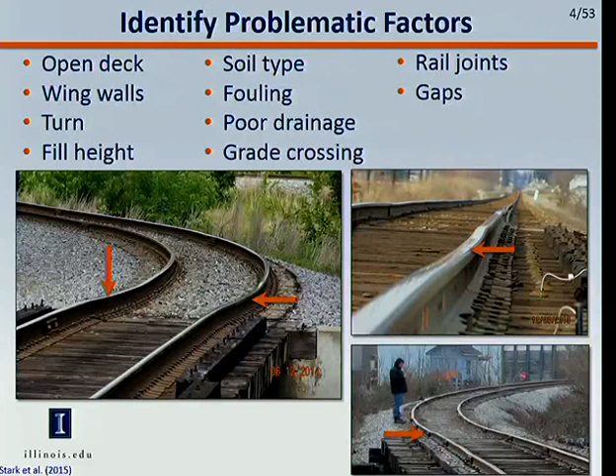And so that's where I'd like to start, is gaps in the track system. These can occur, say, between the rail and the tie plate, between the plate and the tie, and between the tie and the ballast. So that's where I'll start, and then we'll move to some other aspects.

So we started with a tie-ballast gap, and we sort of happened onto that with the instrumentation at 6 Amtrak sites on the northeast corridor near Chester. At these sites, wheel loads and vertical displacements with depth were measured, and there are 2 sites that I want to focus in on, 1 bridge, 2 sites.

It's the Upland Street Bridge and the open track site, which is about 60 feet from the approach, and the approach, which is only 15 feet from the bridge deck. So the open track site actually has more clay in the subgrade than the approach site, but it's still actually performing better than the approach. So less desirable geotechnical conditions, but better performance in the open track.

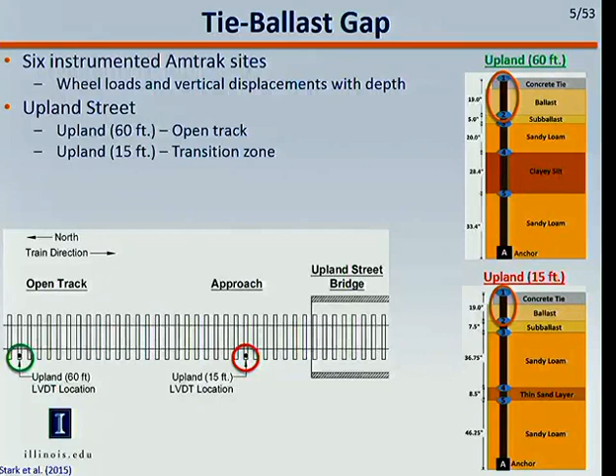So let's take a look at why. On the left is the transient displacements for the open track site, and on the right is the transient displacements with depth for the approach site. Let's focus in on the open track first.

The dark blue line here is essentially the movement of the tie under an Acela power car. You can see the first wheel hitting, and then second wheel, the body of the car, third wheel, and fourth wheel. The displacements there, transient displacements, about 0.4 of a millimeter.

Now the other important thing to notice is the LVDTs at greater depths are showing a similar response as the tie. Notice the peak or largest displacement of the tie, and then the first LVDT and subsequent LVDTs with depth showing essentially the same response. So what that told us was we had good contact or communication between the rail, tie, ballast, sub-ballast, and subgrade, because they're kind of all responding together.

Contrast that with the transition zone on the right, Upland 15, where the dark blue again is the tie, and you can see the tie is sort of moving a little bit before the wheel actually arrives. Then the tie displaces about 1.5 millimeters instead of about 0.4 millimeters, which is a very big difference. Notice the difference in the scale of those 2 vertical scales of those 2 graphs.

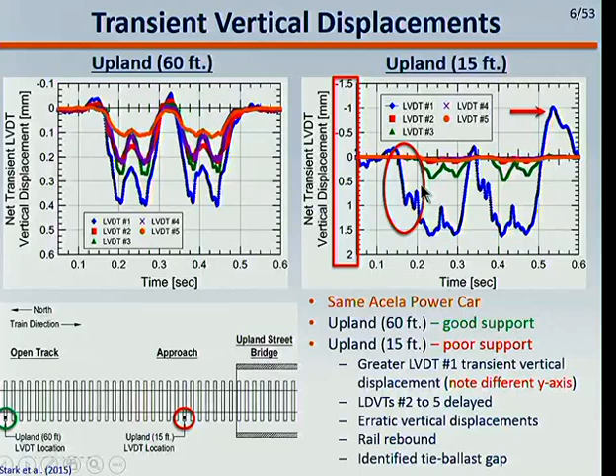So what does that look like in real life with a video? Here's a video of a track with really good support, probably some of the best we've encountered so far. Now watch the rail and the tie in this.

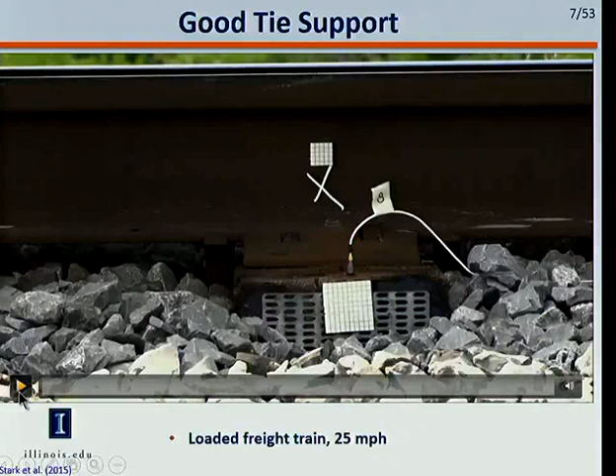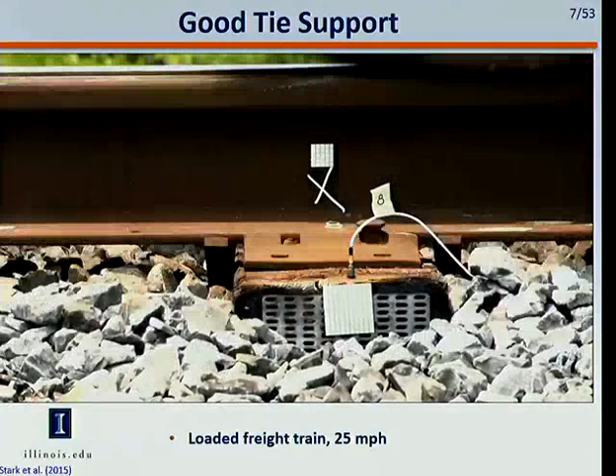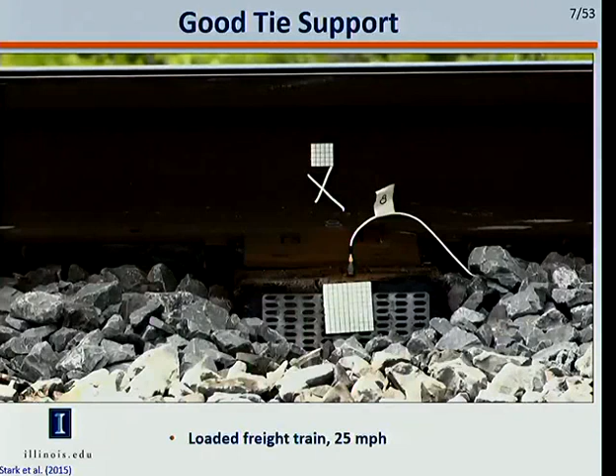Loaded freight train, 25 miles per hour. You can see our accelerometer attached to the tie and two targets, one on the rail, one on the tie, which I'll talk about in just a minute. Look at that - the rail, the tie, barely moving. Real tight, good support, so when the wheel goes across, it's loading the rail, loading the top of the tie, loading the bottom of the tie, and loading the ballast. Now let's contrast that with poor tie support and what that might look like, and explain the Upland 15 data I just showed you and the rebound of the rail.

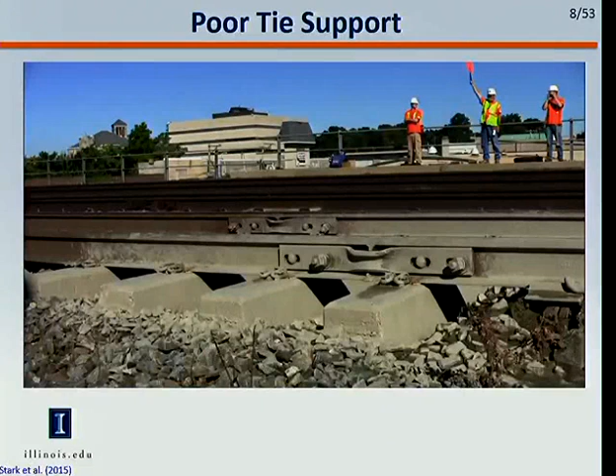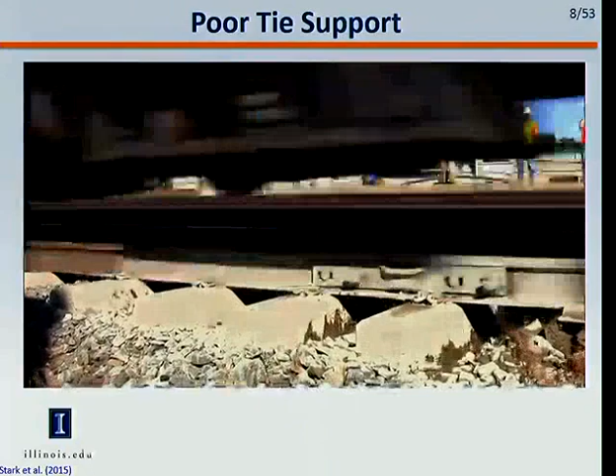This is a commuter train. So you saw the tie go down, the rail pull it back up, and so on for the next wheel.

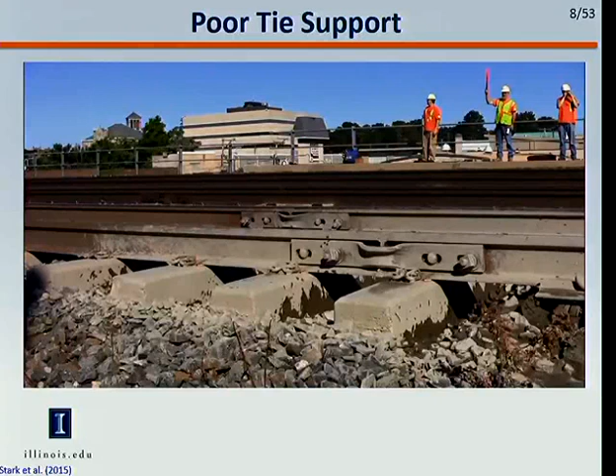Now there's one other thing to notice in that video. Anybody? The water. So there's the poor drainage and foul ballast that you saw on the factor slide I just showed. That led to developing a tie-ballast gap model, which is illustrated on the left in this schematic.

So where we start is with no wheel passes. The tie is in intimate contact with the ballast. The ballast is in a loose condition, less than optimal density. When the first wheel goes across it, which I'll show you a video of in a little bit, that tie compresses the ballast, the particles rearrange, and when the rail pulls it back up, we're left with a gap, essentially from the first wheel pass. So the real question is, how large does that gap grow to be over time?

So here's our model for it. With no wheel passes, this load displacement curve, which I show right here with my mouse, starts at 0, and then with every subsequent pass we have a gap. The question is, how big is that gap? And I'll show you how we're going to measure that non-invasively in just a minute. Then we have the load displacement behavior of the ballast - you can see it's a nonlinear function from the x-axis.

Up to a linear portion, and now we've got the tie in contact with the ballast. We've passed the seating load of the ballast, and now the ballast can start supporting some of the load. That essentially ends up with a linear load displacement curve, as you see there. So that's sort of the framework.

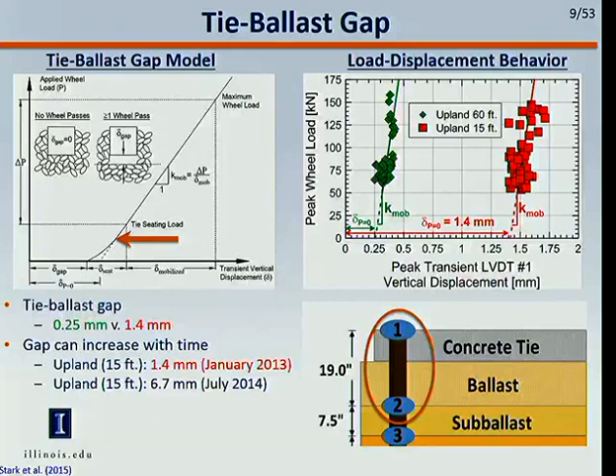Luckily there was some instrumentation also at Norfolk Southern, and that site experienced both loaded and unloaded cars. The unloaded cars allowed us to define this initial portion you see here in the red dots, giving us the initial curve, and then up to the seating load we get another linear portion. From that data we were able to fit an expression for the load displacement of the ballast.

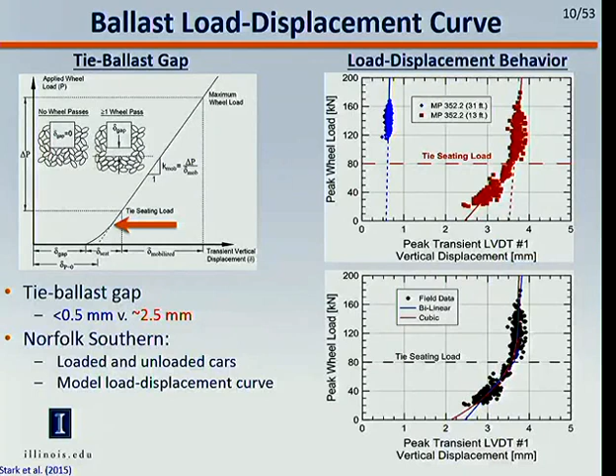We tried cubic and bilinear fits, and I think the cubic fit, in red, looks pretty good. That's what we'll use to predict the transient displacement of the ballast after, say, a repair or for a design, which I'll talk about in a minute. So that set up the tie-ballast gap for us, and the numerical modeling Steve's doing showed it's not just one tie, it's really what a series of ties are doing that control what the load distribution looks like. If we have gaps under multiple ties, as in this schematic, the load distribution varies considerably. So we had to find a way to measure the gap under a number of ties in a stretch of track, not just one tie. And that led to developing some non-invasive techniques for evaluating gaps in the track structure.

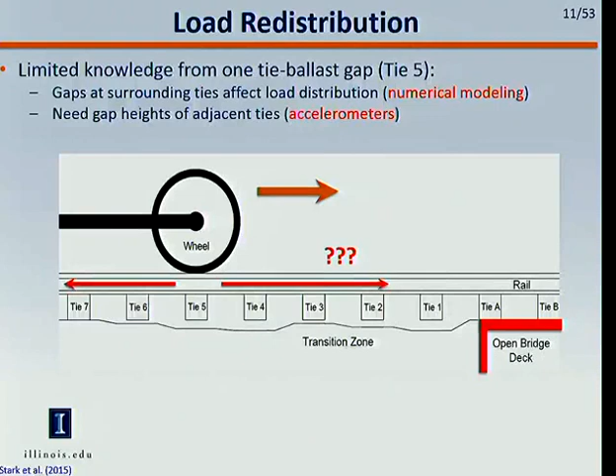So that's part two of my presentation.

Developing non-invasive instrumentation, at this point we're focused on accelerometers and high-speed video cameras. The accelerometers give us an idea of the tie acceleration, and we can use that with Newton's second law, F equals ma, to estimate what the applied loads are from the accelerations. So the accelerometer is giving us the heartbeat or pulse of the track, and high-speed video cameras give us actual rail and tie displacements during the loading.

We've investigated 10 sites so far, and this has been great because we have a range of good to poor support from these 10 sites.

Here's one particular setup on the left. Steve Wilk is here in the background operating the accelerometer data acquisition system. There's a video camera right next to him. And Professor Rose is here in the foreground operating a high-speed camera, sitting on an ASTM-approved bucket, I'm sure of it, with that camera ready to go.

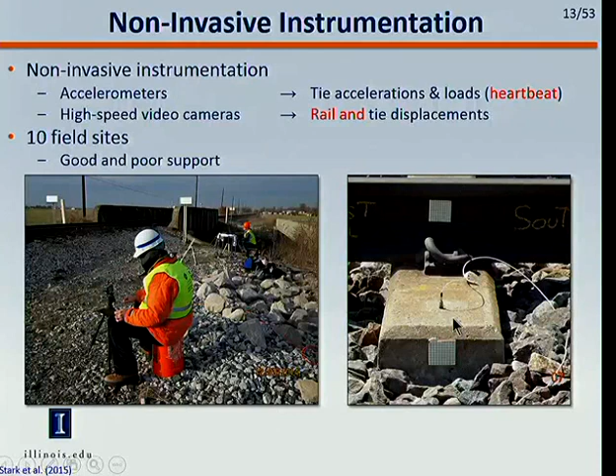On the right is the accelerometer we're using on the tie. A drop of super glue attaches the accelerometer to the tie, and we're all set. You can also see targets on the rail and the tie, and now we're putting targets on top of the tie so we don't have to move any ballast.

Let's see what we get from this. I'll start with accelerometers, taking you back to Chester and the Amtrak Upland Street Bridge site. Notice the tie where the red arrow is—this is a video of that tie, and there's an accelerometer on the end of it.

You can see the tie moving extremely rapidly, with the accelerometer measuring the accelerations of the tie. The response, the time history, is the red lines in the graph on the left. The green is the accelerometer under the same train at the open track tie—so green is good support, red is poor support in the approach. You can see much greater accelerations in the approach zone than the open track, about 30 G in the approach versus 5 G in the open track.

Based on looking at a number of sites, we think if the acceleration is less than 5 G, that's a good indication of good tie support. As I mentioned, we're trying to use Newton's second law, F equals ma, to predict the applied forces from the acceleration data.

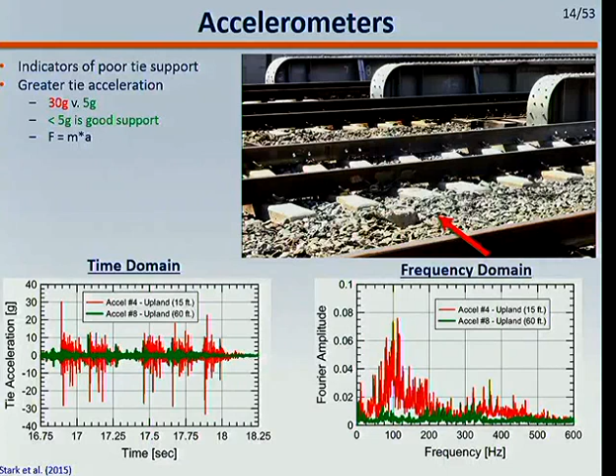So now let's shift gears to high-speed video cameras, and a site where we've used both accelerometers and high-speed video cameras, but this site really lent itself to high-speed video cameras. We have 8 accelerometers. We generally install 8 accelerometers at a site, and you can see them from number 1 on the bridge deck to number 8 out here where my pointer is.

We have 2 video cameras, one on accelerometer 2 and one on accelerometer 3. Now you'll see that accelerometer 2 and 3 have very different behavior, even though they're fairly close together. They're only 3 ties apart, but you're going to see a very significant rail-tie gap at number 2, and a significant tie-ballast gap at accelerometer number 3. We'll also show you the effects of a center-bound tie, the effects of air tamping, and also the effects of 2 transitions close together at this site.

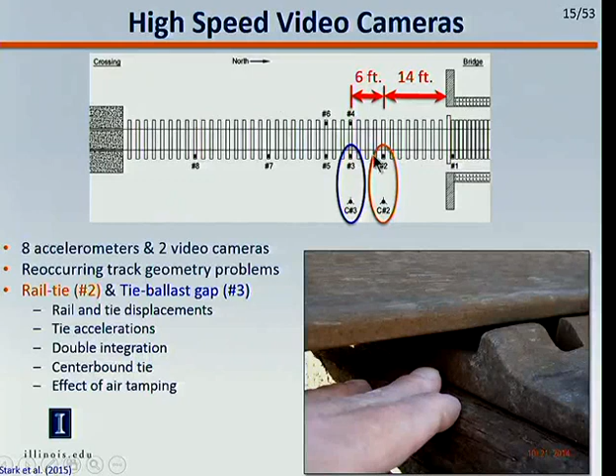So this was really a good site. Here's a grade crossing that I'm pointing to on the left, and of course an open deck bridge on the right. So this really was a good site for us.

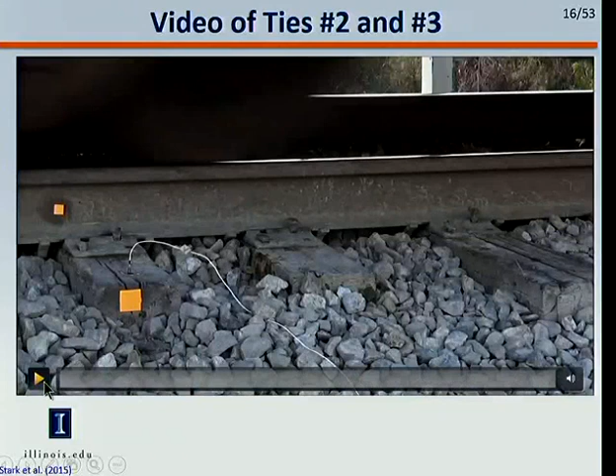So here's a video. The video starts at accelerometer 2, and then I'm going to turn to the left 3 ties, and you're going to see accelerometer 3. Now be sure to notice the difference in behavior between accelerometer 2, which is on the screen, and what you'll see at accelerometer 3.

Pretty significant rail gap. Still a little rail gap, but now the tie, you see a tie-ballast gap, just 3 ties away.

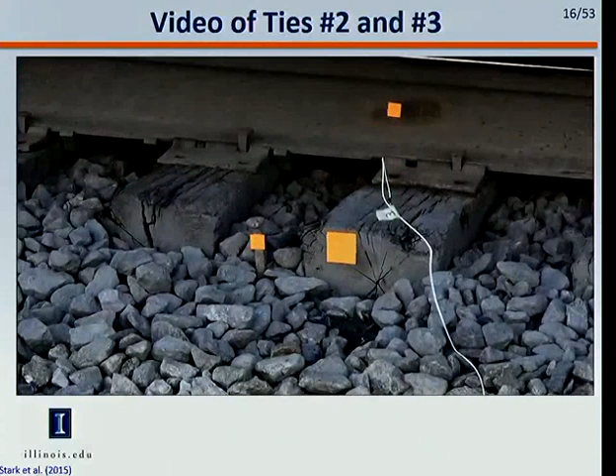Okay, so let's take a little in-depth look at the results from the video cameras and accelerometers. I'll start at accelerometer 2 and where video camera 2 is.

Here is a plot of vertical displacement from the video camera. Blue is the rail, orange is the tie. So as you saw in the video, quite a significant rail-tie gap. And if you look at the time history, you see a displacement of about 4/10 of an inch between the bottom of the rail and the plate. I'll have ground truth for that in just a minute.

Now, because there was such a large rail-tie gap, notice the tie doesn't move very much. There's such a big gap that the tie is really not feeling much load or moving much.

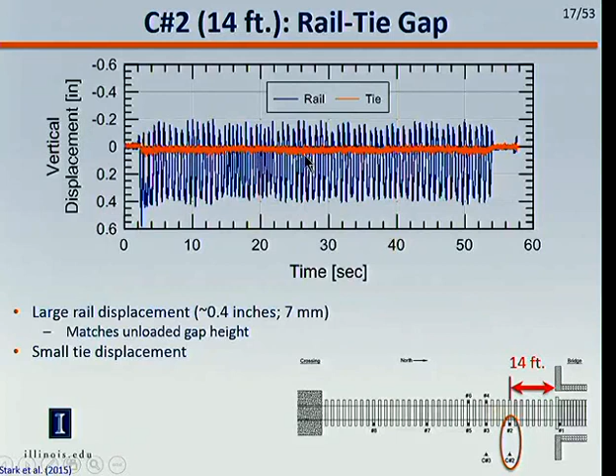So here's a photograph of the rail-tie gap. That's my finger, and you can see it's about 4/10 of an inch, not an inch... inch, not millimeters, which is in good agreement with the time history.

So here we expanded the time history from 20 to 22 seconds. The blue line is the rail moving about 4/10 of an inch, closing the gap, and just moving the tie a little bit, as you saw in the video. There's a little bit of rebound of the rail as it's coming back off the tie, and then back down for the next wheel load.

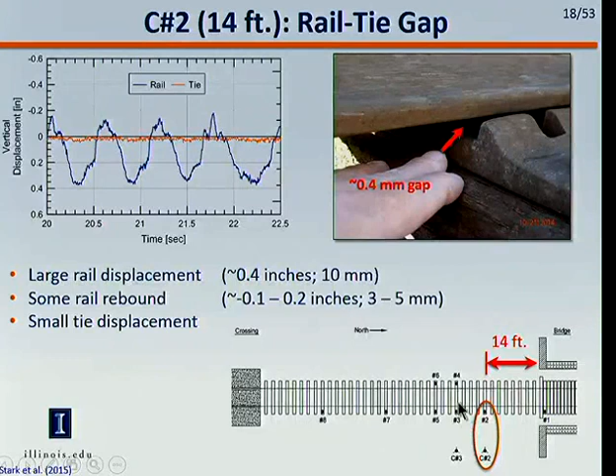All right, so now let's shift to accelerometer 3 and camera 3. Totally opposite, because you saw in the video there was a fairly small rail-tie gap, but a much larger tie-ballast gap. So the orange is now the tie moving, the rail is the blue, and the rail is deflecting now only about 2/10 of an inch, and the tie is now moving about 1/4 of an inch, because we've changed the gaps.

Now, this is about 20 feet from the bridge deck, and accelerometer 2 is 14 feet. So we can zoom in on the accelerometers now and compare that to the video camera.

Actually, I'm going to talk about the tie first. So we have a target on the rail and the end of the tie. And this led us to think that this tie is center-bound, because notice that the tie, the orange, is moving more than the rail. So the end of the tie is moving more than the rail, so it's bound in the middle, and it's sort of like cantilevered, with the end moving more than the rail.

I'm going to come back to this center-bound tie in just a minute and show you the accelerometer on the other end, number 4 right here, and you'll see 3 and 4 move about the same, and essentially the middle is fixed, so a center-bound tie.

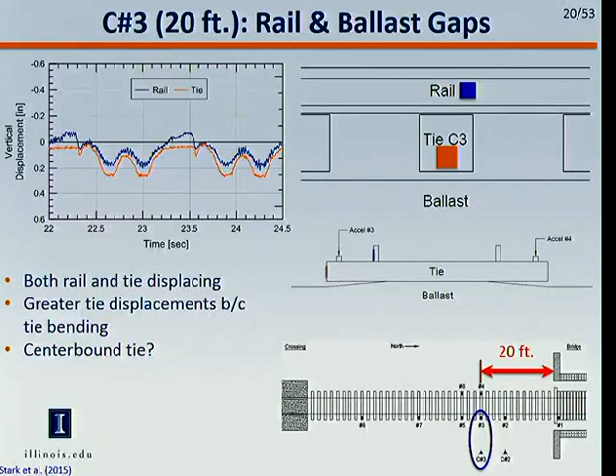Okay, so let me summarize accelerometer 2 and 3. At accelerometer 2, 14 feet from the bridge, you can see a significant rail gap here and very little tie movement. You move 6 feet away and you have a greater tie movement than you do a rail tie gap. So both gaps playing into the performance of the track.

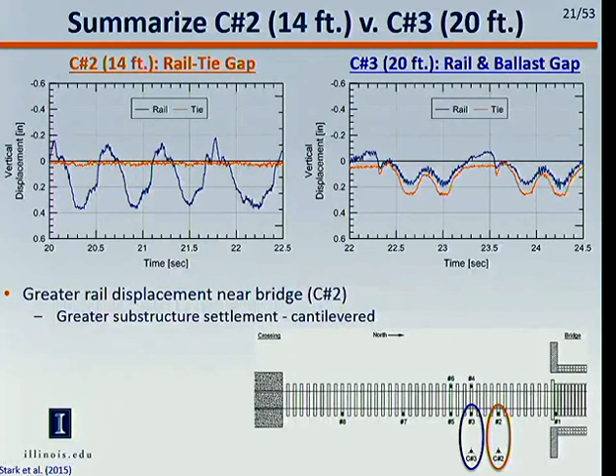We can use these acceleration time histories and double integrate them to get a displacement time history. Now we can compare the video camera displacements to the accelerometer-derived displacements and check our accuracy. So let's do accelerometer 2 and camera 2.

This top graph is the video camera displacement of the tie. You can see about 6/100ths of an inch tie displacement. And if you doubly integrate the acceleration time history, it's about 5/100ths of an inch. So pretty good agreement. Let me shift over to accelerometer 3.

We have about 1/4 of an inch to 3/10ths of an inch from the video camera, and the accelerometer giving us about 2/10ths to 1/4 of an inch of tie displacement. Again, pretty good agreement between whether we measure the displacement via camera or via accelerometer.

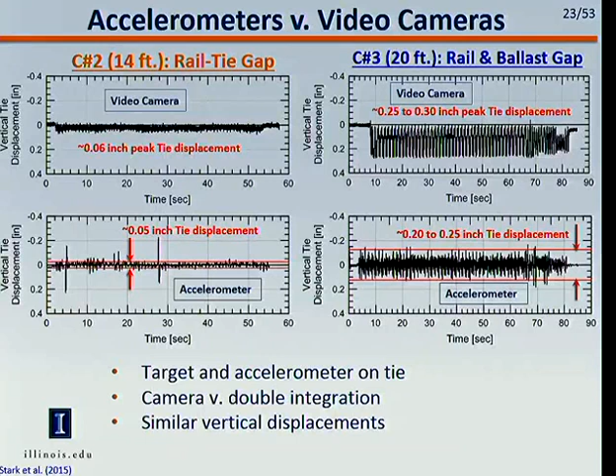Okay, so that's all the good news. The even better news is, on one of our visits to the site, the next day, the railroad air tamped this stretch of track. So, start of the second day, they air tamped, say, from roughly just in front of that grade crossing to the bridge deck.

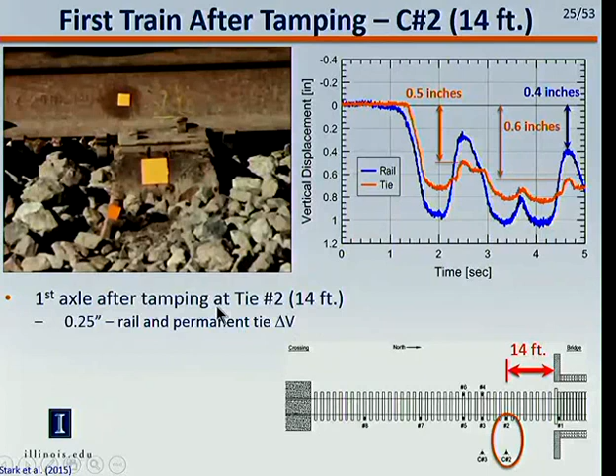Now let's look at the tie. The tie is the orange line. So it initially goes down about 3/4 of an inch, comes back up to 1/2 an inch. So on that first wheel pass, we've had about 1/4 of an inch - there's the start of our gap. By the end of this little stretch, we have the rail at 4/10 of an inch permanent displacement and the tie at 6/10 of an inch. First train across it. So let's move to the 6th train across after tamping.

So on the left is the graph before tamping, pre-tamping. I showed you this one earlier, the rail moving about 4/10 of an inch and the tie moving considerably less than that. By the 6th train after tamping, the rail is now moving about 3/10 of an inch, a little better, and the tie still moving about the same, because we have a fairly large tie rail gap, so the tie is not being loaded significantly yet.

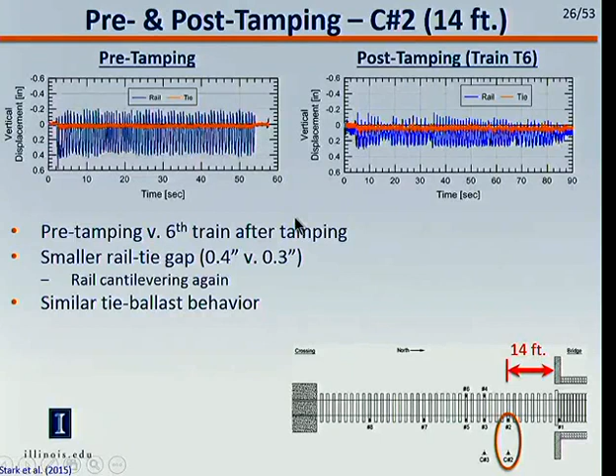So this was really a nice exercise, because we could start evaluating the effect of remedial measures, which you'll see in just a minute.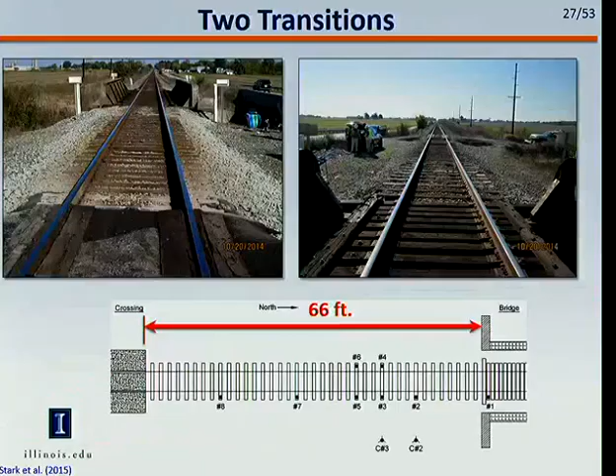Right, and just one other question. Several slides back, you don't have to go back, but I noticed you had tank cars on there, I didn't know what that was about. Yeah, I know where that is. This is back to the centerbound tie, and we had accelerometer 4. We recorded that these time histories or acceleration peaks corresponded to tank cars, and they were a little higher. So if you're a tank car person, maybe you can help us out with that. We were thinking that basically the fluid in the tank car may be moving a bit and giving us a little higher acceleration, but those being tank cars versus, say, the box cars that were in front of it.

With train speed, we do see differences. Those two trains, we tried to get around the same speed, apples to apples as much as we can, but can't control everything. Those are similar spots. Your first frequency domain shot there, where you identify those peaks, gives a great idea of how fast the train's traveling. That actually is like high vibration, and you can pick that out, but a lot of it depends on timber versus concrete.

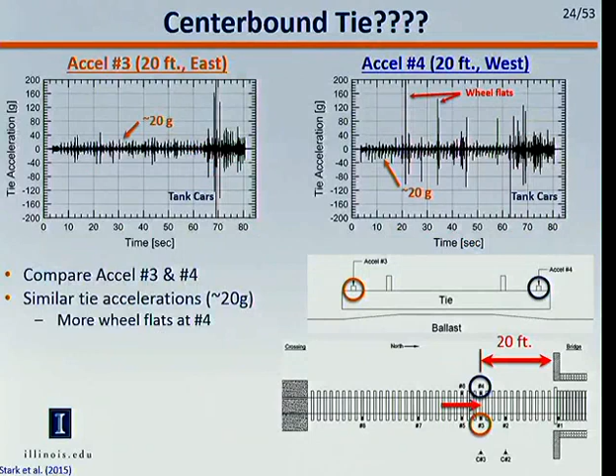Not a very good mic, man.

Okay, are we good on train direction?

All right, so that takes me to the third point of the presentation: design and repair measures. I've been working on highway bridges since the 90s, a study with IDOT on highway bridges. They're somewhat complicated, but I find those much less complicated than railroad bridges.

For example, on the left is the replacement bridge south of Minneapolis. The existing bridge is similar to the I-35 bridge that collapsed, and so MnDOT said we ought to take this one out too and put in a new one. Very soft, compressible approach. We overcame, or at least so far have overcome, the soft approach with a geosynthetic reinforced load transfer platform supported on pipe piles, which you see on the left photograph. Then on top of the load transfer platform, lightweight fill, geofoam to form the embankment, and then a pavement to distribute the load. So far so good with this highway bridge approach, a complicated site.

But for railroad bridges, I'm finding it's more complicated, a more complex problem. So what we tried to do was simplify this complex problem: how do we boil down all the different sources of displacement, both transient and permanent, that can occur, so we can assess whether our design or remedial measure will be effective? We tried to get away from complicated things, like calling something a banana when you can obviously call it curved yellow fruit, and make it really simple. Hopefully somebody enjoyed a piece of curved yellow fruit for lunch today.

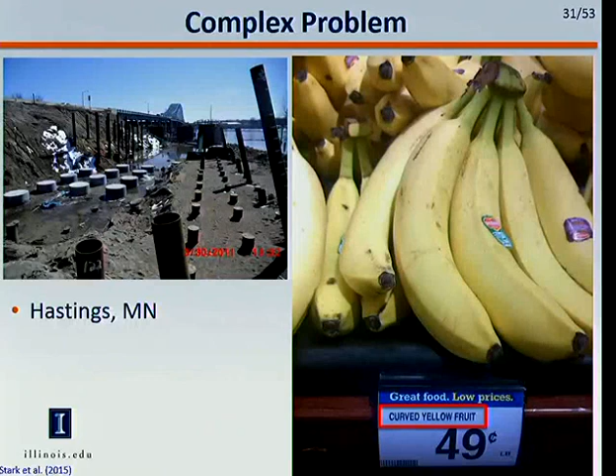So here's what we came up with: a transition zone scorecard. We welcome comments on this, because maybe this isn't as simple as yellow curved fruit, but here's our attempt. We tried to summarize all the sources of both transient and permanent displacement in the approach and on the bridge, or the transition and the bridge. T is the transition, B is the bridge.

Look at all the sources: rail compression, rail tie gap, which I just showed you a video of, tie pad or plate displacement, tie displacement, tie-ballast gap, which I illustrated with video, ballast displacement, which we got our arms around with a cubic function, sub-ballast displacement, subgrade displacement, and lateral displacement if it happens to be a curve. We're trying to use accelerometers and video cameras to come up with values of these particular displacements. At the end, you see the bottom line here where I'm pointing: total. We want these two totals, in the transition and the bridge, both transient and permanent, to be equal.

If they are equal, we have no differential movement, no bump at the beginning or the end of the bridge. Let's see how this works. I started the show with an open deck bridge, so let's go back to that. There it is on the left. Obviously it's undergone some differential movement.

Why is that? If we look at the transient displacements, the rail compresses essentially the same in the transition versus the bridge—it's the rail. There is a rail tie gap in the transition; there isn't on the bridge. So there's our first source of differential movement. We'll say the tie plate has the same displacement on the transition as the bridge.

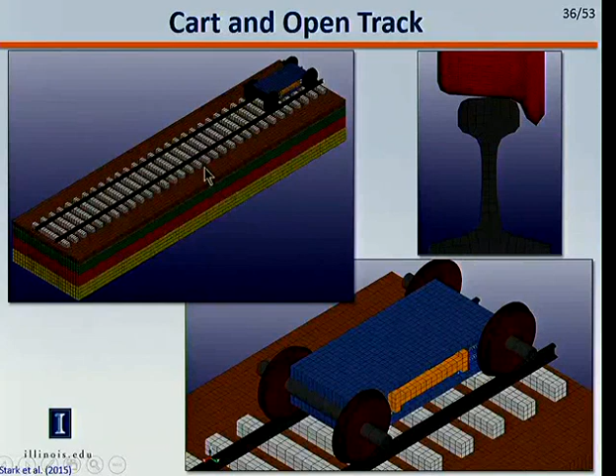In this model we can put gaps under these ties. We can have multiple ties with gaps, vary their thickness or height. Here's a video of a tie with a gap and the wheel coming across it. The gap closes, the tie loads up the ballast below, and now we can study the effect of load distribution for different thicknesses or heights of gap. That's illustrated here.

Keep that in mind as we put gaps in the system. Now let's put gaps in that same stretch of track in our numerical model. We'll focus on tie 19, and put gaps under 18 and 20. With zero gap under tie 19, it's feeling 40% of the wheel load.

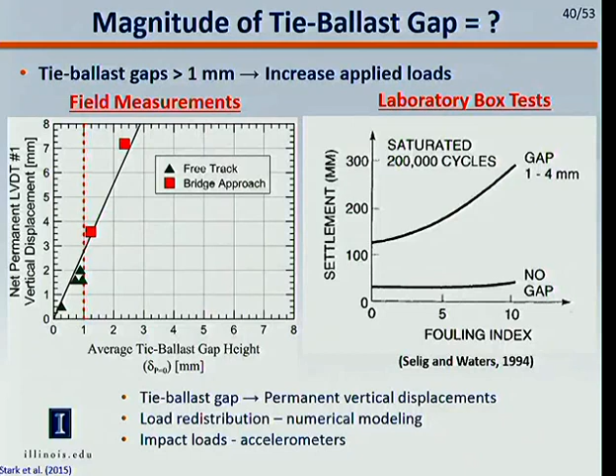So the takeaway of that is fairly small gaps -- the tie doesn't have to move a lot. The rail starts bending. The rail has a high stiffness, and it starts shedding the load to adjacent ties very quickly.

So let's look at the results of the approach now in the numerical model. Here's the cart rolling across. The approach is on the left. Here's the start of the bridge deck where my mouse is to the right. And even if we have no gaps and the rail is flush from the transition to the deck, perfectly flush, we'll still get a bump or a dip at the bridge, because as the car is coming towards the bridge, we're getting transient displacement of the ballast, the subgrade, the subballast, and that's leading to this dip right here.

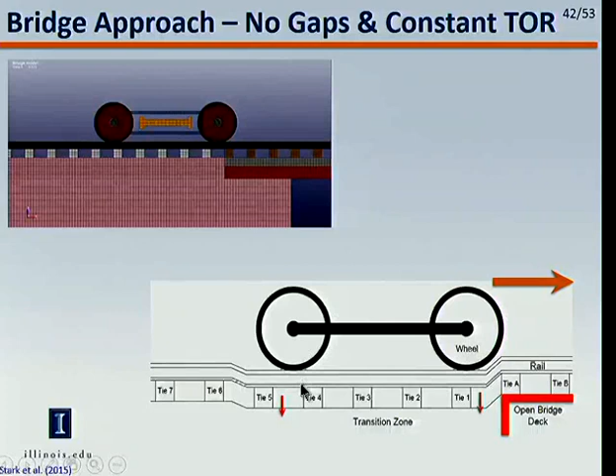So even if the rail's flush, we'll still get some transient displacements, and now what happens, the front wheel bumps into the deck. It's causing an impact load, and that'll also cause the back wheel to drop a little bit, and you can see that in our numerical results.

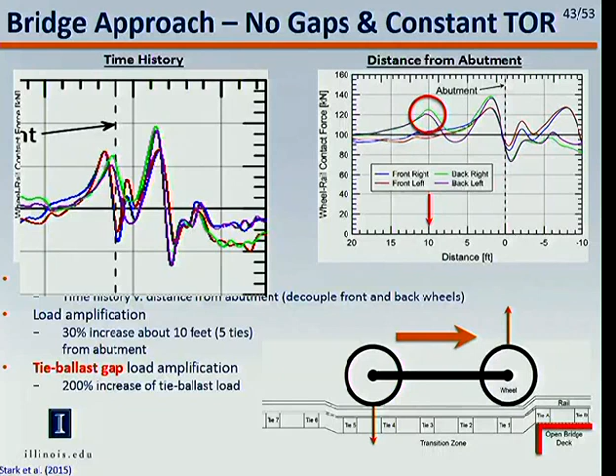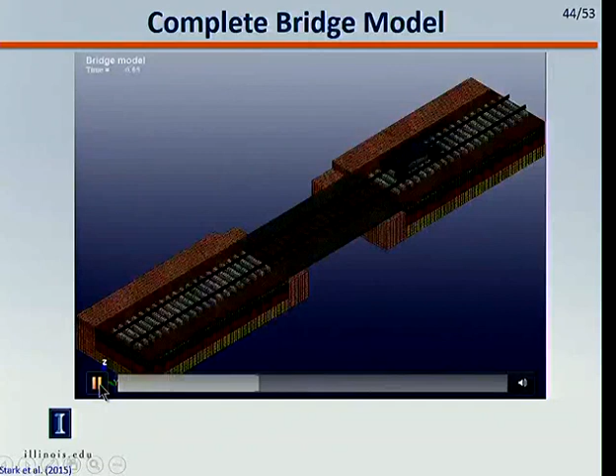So here is the model extended to look at the exit of the approach. There it's rolling on and rolling off. And like you saw with the accelerometers, northbound and southbound, you saw different behaviors coming off the approach from either direction that I showed you.

Tim, your theoretical cart is 10 feet wheel spacing? 9 feet, 4 inches. Okay, close enough. Alright, thanks. How am I doing, Chris? You're fine. Okay, about 5 minutes? Yeah.

Alright, so let me wrap up with the last area that I have time to talk about, substructure modulus. I mentioned the ballast underneath the tie, trying to get a handle on the modulus of the ballast, how stiff it is, is it stiff enough to take the applied wheel load, and so on. So we're trying to measure that stiffness using seismic waves or surface waves.

We're trying to modify a portable pavement device for railroad applications, which is pictured here. I'll explain how this device works and how we think we might be able to adapt it to railroads.

Let me go to this diagram at the top. The cylinder I'm pointing to is an energy source. There's a little anvil in that cylinder. It drops, and when it hits, it creates a little seismic wave that goes through the ballast and arrives at this first sensor that I'm pointing to. The time it takes for that wave to get to the first sensor, we use to calculate the Rayleigh wave velocity, time and distance.

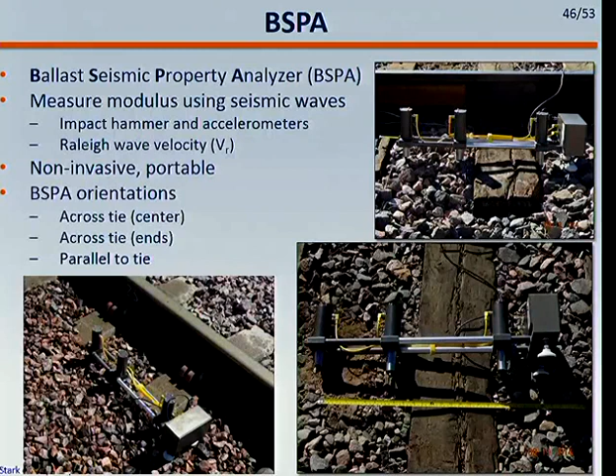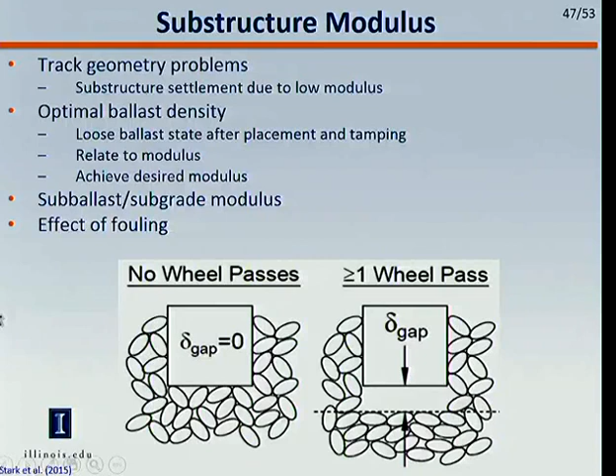Here's the concept. If we go back to our tie-ballast gap, initially with no wheel passes, we could measure our modulus here under the tie, see if it's going to be sufficient for the applied loads we anticipate. If not, we have to compact it or make it denser to hold whatever loads we're predicting, so we don't get a tie-ballast gap, or significant tie-ballast gap developing. Depending on the spacing of the sensors, we can look as deep into the subgrade or not. Also, we can look at the effect of fouling, which I'll demonstrate in the next slide.

So we've used this at several sites. I'm going to use some data from TTCI's track. This was very interesting because the lower photograph on the left here is actually a heavily fouled site, and the one on the right is actually a clean ballast site. In both cases, TTCI was able to mobilize the fire department, thanks to Colin Basye, and the fire service came out and wetted both areas up for us so we could evaluate modulus before wetting and after wetting.

On the clean ballast site, you can see that the modulus, this is the Young's modulus of the ballast, not the track, is 30 to 40 KSI. Now the interesting aspect is the fouled area. Dry, it exhibited a high Young's modulus, 50 to 55, and that's because the dry soil particles or fouling particles fill up the void space of the ballast particles, giving us a stiffer mass. But when it's wetted, that modulus drops by almost a half, to 20 to 25 KSI.

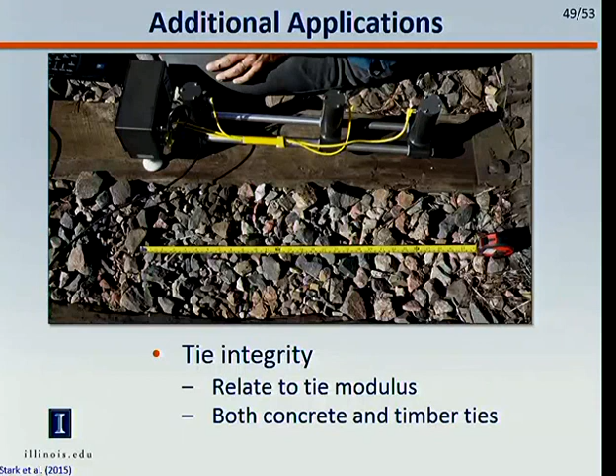One interesting offshoot of this seismic testing has been the need to get a handle on what the waveform of the tie looks like, whether it's timber or concrete, so we know which wave is the seismic wave coming under the tie, through the ballast, and out the other side, which we use to measure modulus. We quickly measure the modulus and waveform of the tie, so we're thinking this might also be a way to investigate tie integrity as we move forward with this device.

To wrap this up, differential, transient, and permanent displacements lead to differential movement at bridge transitions. It's important to account for all transient and permanent displacements in bridge repair and design, so we came up with a scorecard to do that, hopefully simplifying things and guiding repair and design processes. Poor track support is generally seen with accelerations greater than 5G. Higher rail and tie displacements lead to load redistribution among adjacent ties and can cause significant impact loads at the bridge approach, as shown in the numerical modeling. We hope to establish a permanent site to study these effects over time and environmental conditions.

Finally, our ballast seismic property analyzer—hopefully we can modify that to encompass two ties and measure ballast modulus, the effect of fouling, and also tie integrity. So with that, I'll stop and try to answer any questions.

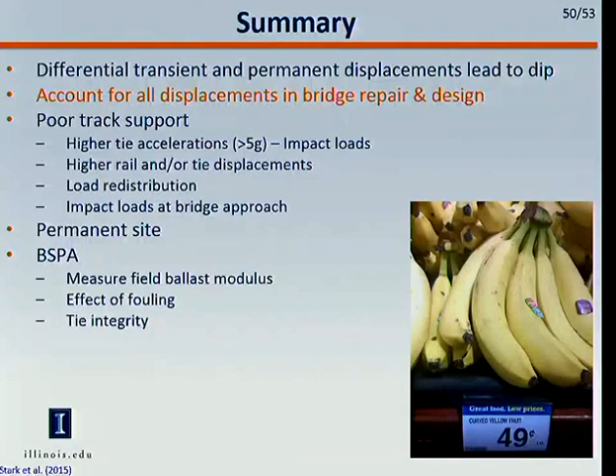What are your thoughts on the next steps, or maybe some solutions that the industry might potentially develop or implement as a result of the work, or the insights you've gained?

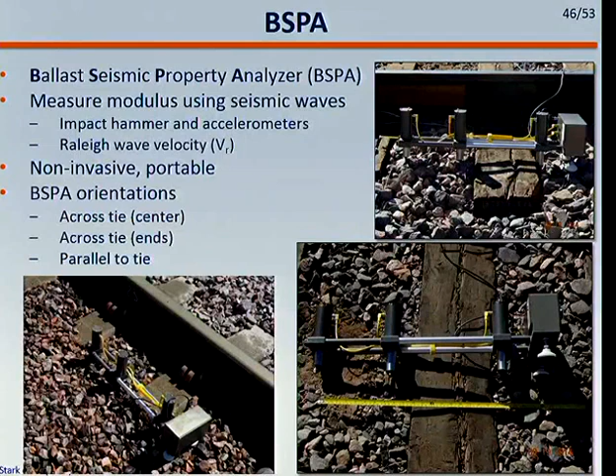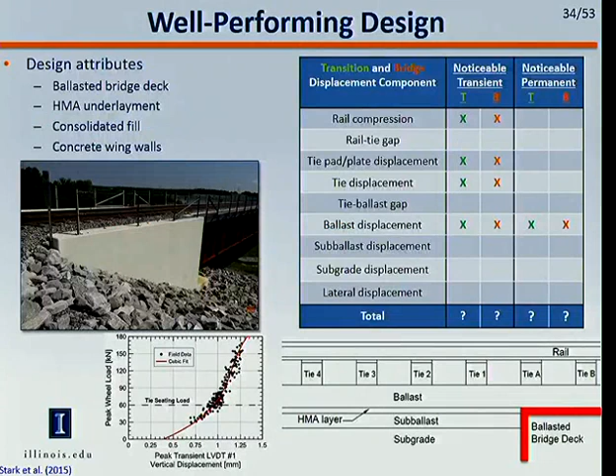So how can we do that with a railroad bridge? I think they have to remain on deep foundations, so how can we put some more X's on the bridge column in this score sheet, and put some more X's under transient movements for the bridge, because otherwise only the transition is moving, not the bridge. So how can we do that? A ballasted deck, because then we have load displacement behavior similar from the transition to the bridge. Putting some surface on the bridge deck, such as pads, gives us a little displacement to match up with some of the displacements we're seeing in the transition. Again, the idea is that the transient displacements in the transition are roughly equal to the transient displacements on the bridge, because that's where we have to get to at the end of the day. If they're not, you get a differential movement transiently—the front wheel hits the deck, and it just sort of goes bad from there. So I don't know, that was probably too long of an answer for that.

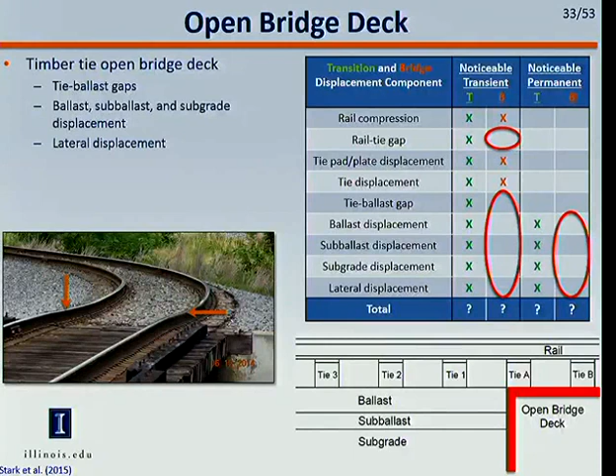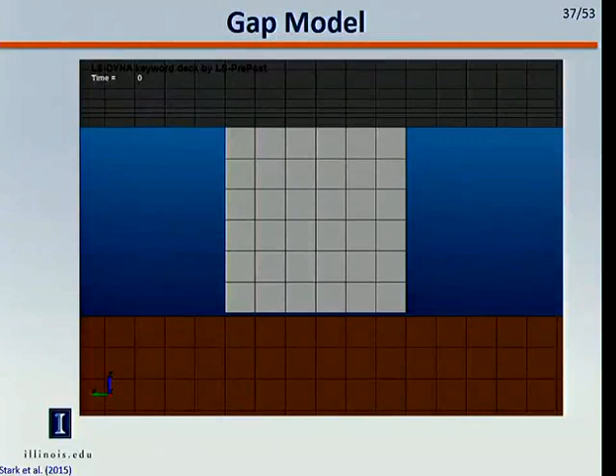Yeah, so you're talking about this graph, the one with the open track gap? When I go back. Back? Yeah. Forward two slides. Yeah, this one.

So is there lateral restraint? Everything we pretty much focus on is vertical movement. It's vertical, calibrated, so we focused on that. We started off with LVDTs, and mostly we just go up and down. So we really haven't gotten to lateral movement at this point, but we've always focused on straight track, where it could be too much.

Yeah, because I saw the model looks very comprehensive. You have wheel and rail contact. I was assuming there was some lateral force induced by the moving wheel. But yeah, as I said, we probably can look into that further.

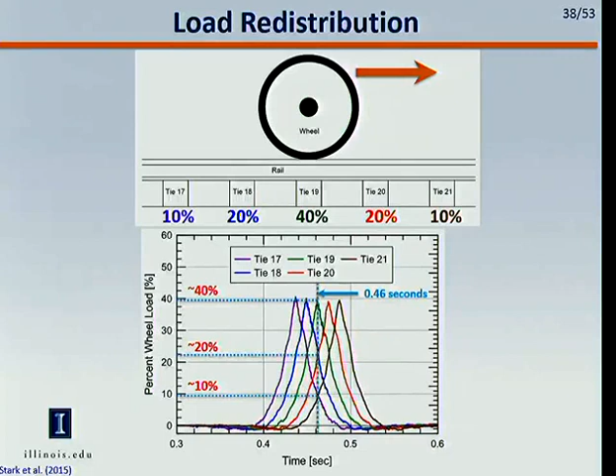Thanks. No, and so if we go back to the video of the model, Upland Street, it's essentially a straight track across the bridge. And remember, the first photograph, open deck bridge, no wing walls, and a turn, giving substantial differential movement. So right now, we just looked at straight track.

Conrad, I think you hit the nail on the head when you said it's balancing the displacements of the bridge and the track, and how do you achieve that. You mentioned ballast deck bridge, which might be an obvious choice, but in this particular case, because you have so many upland streets, it's not just there by itself, there's a series of them so closely spaced that you can't just convert one to a ballast deck without affecting everything else around it.

But in reference to the pads on the bridge, in fact Dr. Kerr from Delaware did that, and I don't know if it was Upland, but it was one of the streets here in Chester back in the mid-90s. The pads were in there for a while and seemed to perform all right, but they didn't have the instrumentation that you have now to really quantitatively evaluate them. So it might be interesting to look at his approach and get the results from what he did and see how we can apply it today.

Yeah, I agree Conrad, and we're familiar with Professor Kerr's attempt there. I think what we could bring to the table is the load displacement behavior, because we have to balance the transition to the bridge. We have to have a pad that simulates all the displacements that will still occur in the transition but are not going to occur in the bridge. I forget what pad Professor Kerr used, but it was almost like a damping pad, more so for vibration.